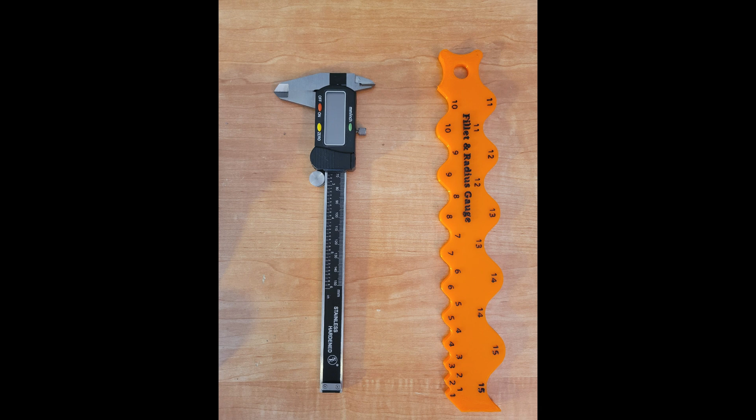The first step for beginning a design process is accurate measurement. To measure length in a straight line, I will be using a digital caliper. And to measure the radius of curved corners, I am using a printed tool called a fillet and radius gauge.

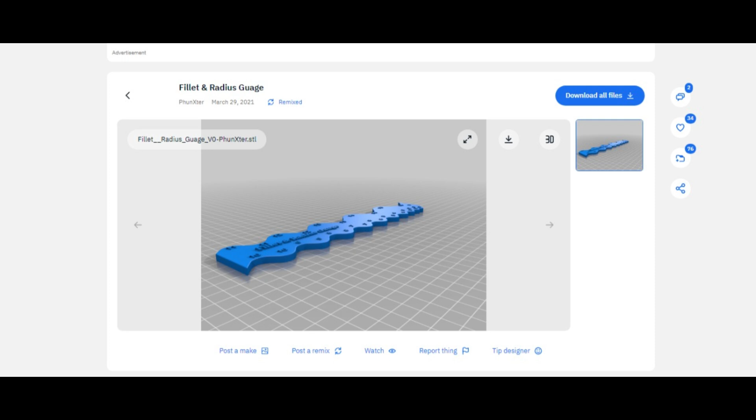Before we go any further, let's say thank you to the person who came up with this brilliant idea. I will be providing a link to download the STL file for these tools in case you are interested in downloading and printing one for yourself.

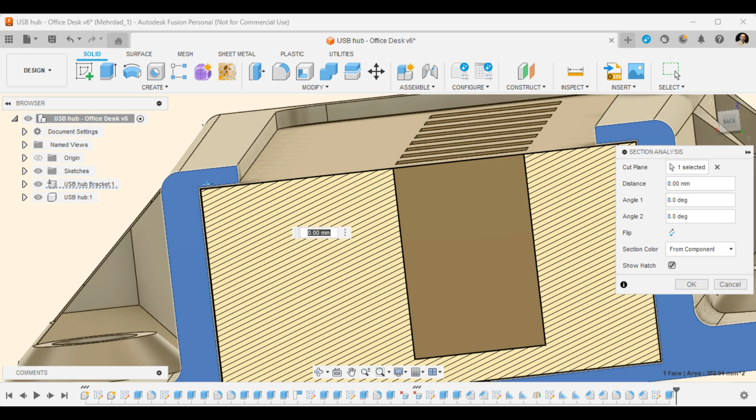There is a point I want to add, and that is about the tolerance or air gap between the two components on this design, which this amount is slightly different on each make and model of printer. In my case, 0.2 millimeter is sufficient.

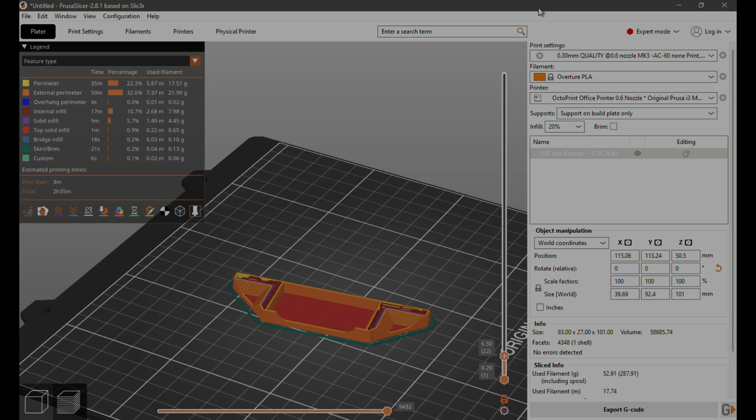And now is the time for printing. The setting I use to get the best print quality is a nozzle with a 0.6 millimeter diameter. The material I used is PLA. The default temperature setting is 210 degrees for the hot end extruder and 60 degrees on the build plate.